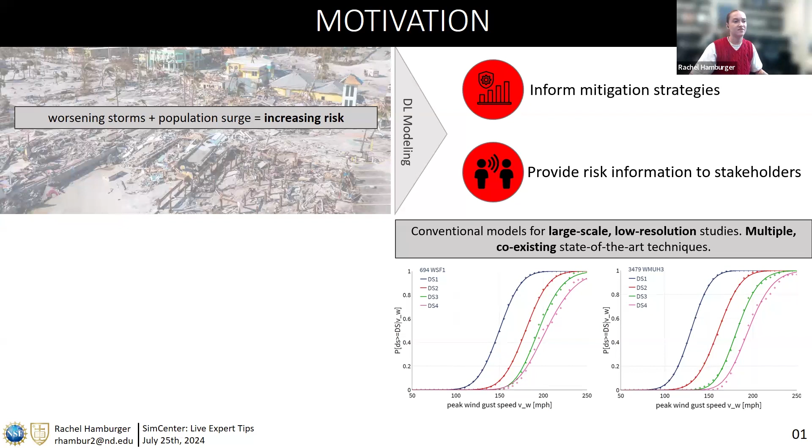However, the conventional models used for this sort of simulation were designed and are used for large-scale, low-resolution studies, while the more complex models and data used to calibrate them are part of largely proprietary systems. Now, there are many examples of research advancing beyond the traditional. However, the organic evolution of this field has led to several coexisting state-of-the-art techniques. Thus, we propose our unified approach, which presents a standardized vocabulary and framework, enabling a better understanding of gaps, needs, and capabilities in this research area, while facilitating integration through our shared parameter library.

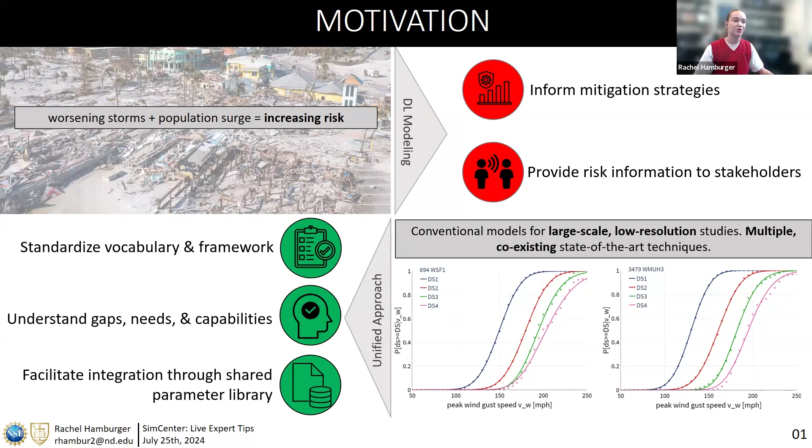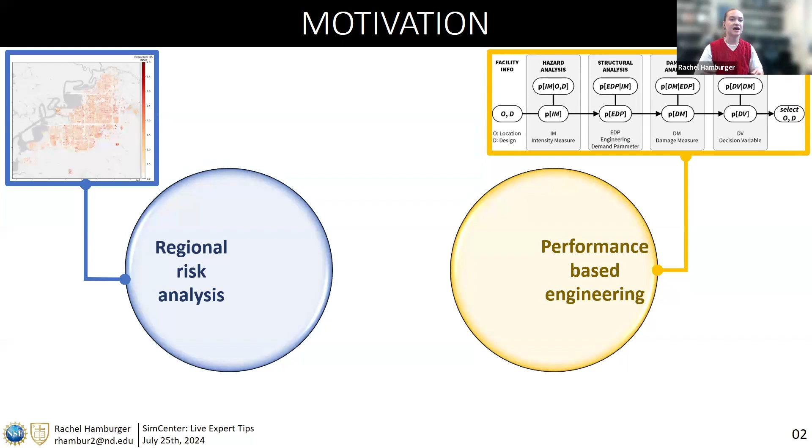So, throughout this study, we were particularly interested in understanding how high-resolution hurricane risk analyses were performed. Historically, regional risk analysis and performance-based engineering were developed independently, with the former relying on more simplified models to assess large building inventories, and the latter focusing on more detailed assessments of individual structures. However, with modern high-performance computing capabilities, these assessment methods are beginning to converge, enabling high-resolution hurricane regional simulations. And so, therefore, it was our objective to bring these granular damage and loss models into the SimCenter's existing infrastructure.

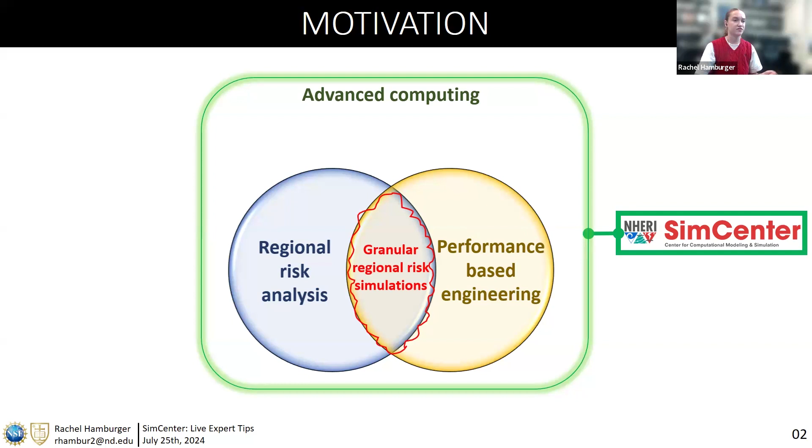Now I'll touch on just a brief outline of my presentation. I'll start with an introduction to our generic framework before moving into its applications to different hurricane hazards. I'll then describe what demand and damage calculations look like for each of our 3 hazards, with only a brief description of loss calculations. And finally, I'll conclude with a discussion about data. Now, for this presentation, I'm going to forego conversations about hazard characterization in the interest of time. But if you're interested in learning more about this step, we are publishing a manuscript which includes detailed descriptions about that.

Throughout this study, consistency in vocabulary remained a top priority for us. We paid careful attention to all of the terms in literature and used this to inform a cohesive dictionary of the vernacular that we use throughout our study. The table on the left is a list of all of the vocabulary that we define in our manuscript. And I'm not going to go into detail about each of these, but I do want to highlight 3 key asset definitions that are very important to understanding the framework.

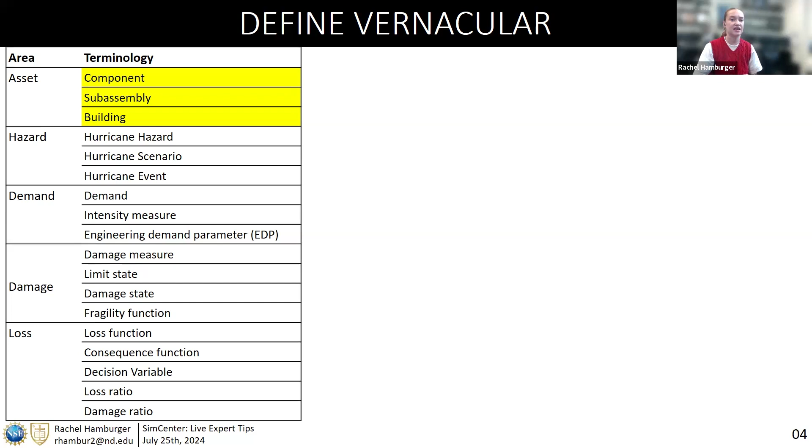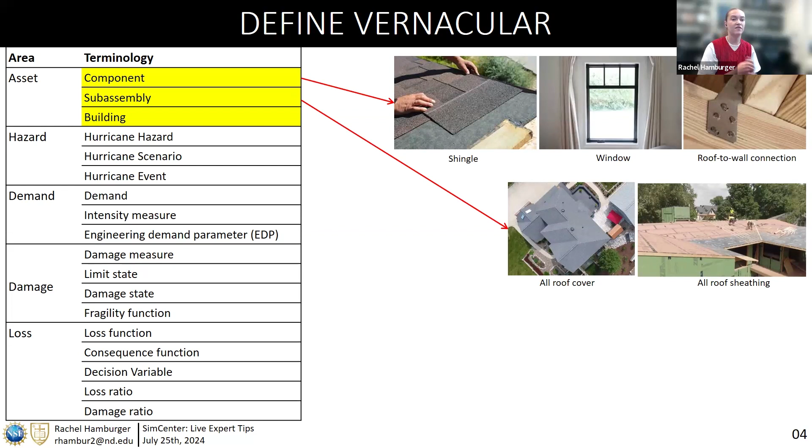The first is a component, which is the smallest functional unit of a structure and includes examples such as a shingle, a window, or a single roof-to-wall connection. The next is a subassembly, which is a class of components that all function together, such as all the roof cover or all of the roof sheathing on a structure. And then finally, we have a building, which is the entire structure comprised of multiple subassemblies. Now, keeping these in mind, I'm going to continue to introduce some definitions as they are relevant throughout the presentation.

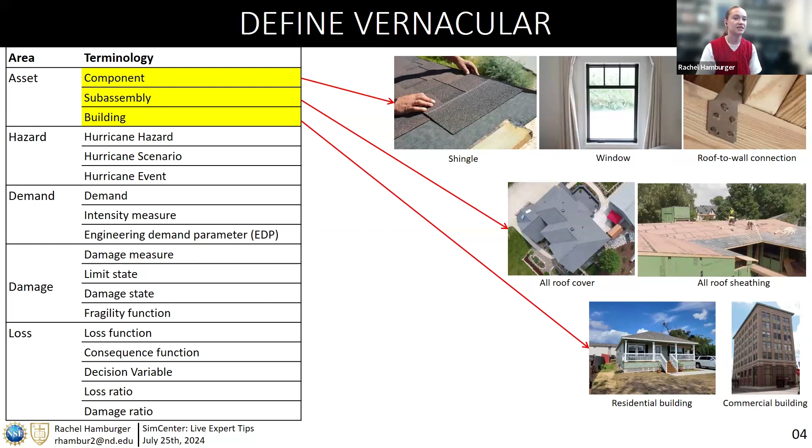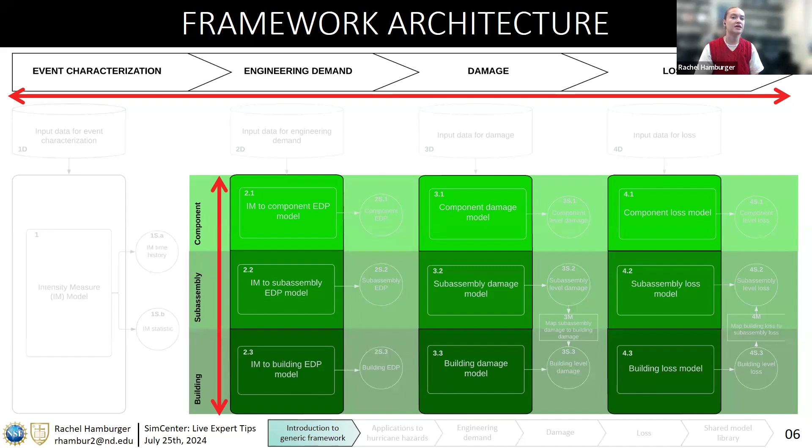Okay, let's move on to the introduction to our generic framework. The architecture of the framework could be understood as a matrix, with columns representing steps that follow a performance-based engineering setup, including event characterization, engineering demand, damage, and loss. Rows are decomposed by resolution, and they describe whether analyses are performed at the component, subassembly, or building level.

Each step is comprised of a unique group of nodes, and nodes are labeled according to their function. At the top, you'll see our input data nodes that have a label of D. And though the specificity of input information will probably change depending on the resolution of the model that you're using, the input data nodes are meant to describe the minimum information needed for each step.

Next, our gray rectangular boxes are our method or model nodes. Available model nodes are informed from those commonly available in literature, and they vary in terms of specificity of input, the resolution of the output, and different parameters or calibrations. These nodes are labeled x.y and represent a model or a method at x step for y resolution.

In yellow and with a label of S, we have our output nodes, and each step can have multiple output nodes for different resolutions. And finally, in orange, we have our mapping nodes with a label of M. Mapping nodes allow for communication between different output resolutions, allowing the user to traverse easily between component, subassembly, or building-based assessments.

Putting that all together, we arrive at our final product. Now, you'll notice from this figure that the framework is not specific to any one hazard, but with a thorough enough understanding of the literature, it can be applied to different hurricane hazards. So that's exactly what we did. We performed an extensive review of 3 hurricane hazards, and then we used what we learned in order to populate that matrix for each of the hazard contexts.

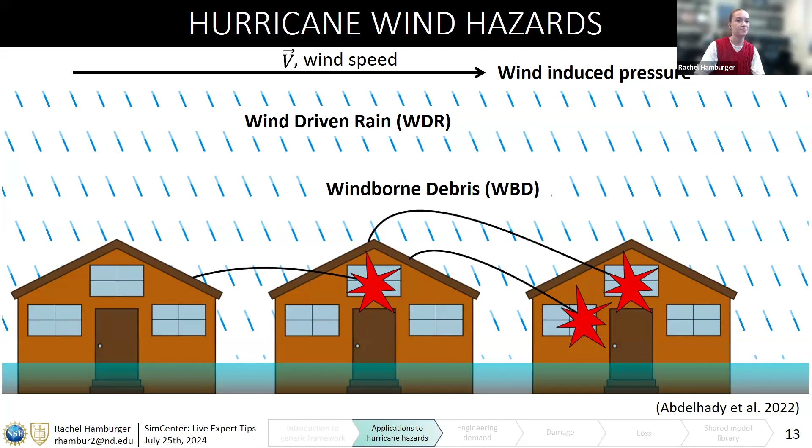Next, we have our windborne debris framework, and you'll probably notice right off the bat that this matrix does not have a loss step. And this is because in loss analysis, the cause of the direct damage is not typically considered. Instead, our loss calculations are dependent on a cumulative total damage incurred. And because of this, it eliminates the need for additional loss models in the windborne debris matrix.

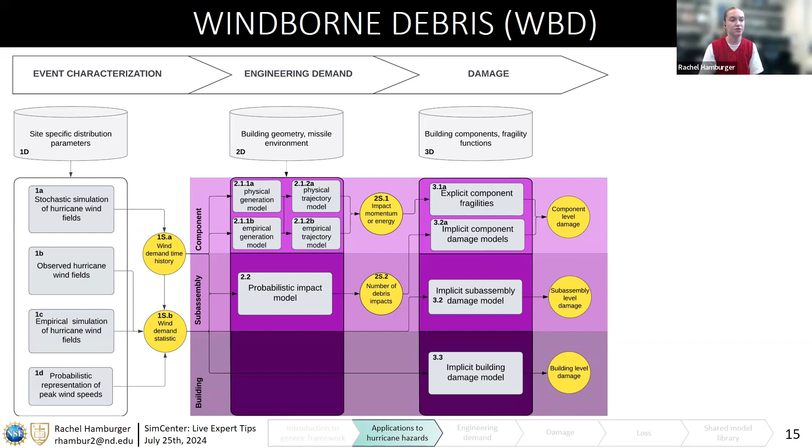And then finally, we have wind-driven rain. And though wind-driven rain does not cause direct structural damages or losses to our building, the resulting contents and interior loss are substantial. So accordingly, most of the work in quantifying wind-driven rain loss effects is focused in the loss section.

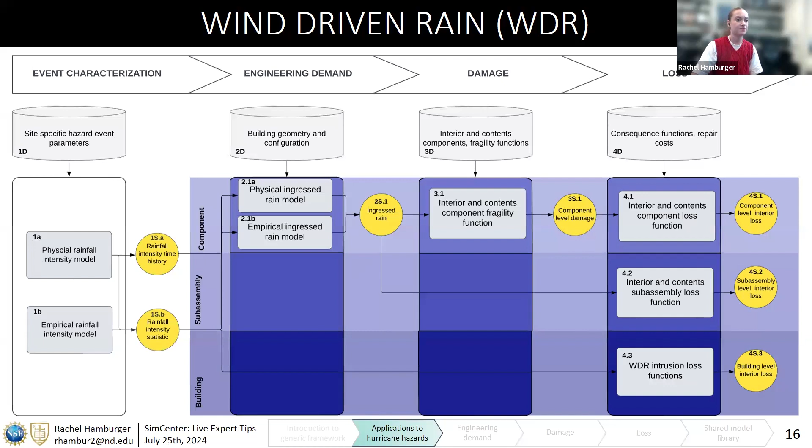Okay, now that we have a solid background on our generic framework and our hazard-specific matrices, it's time to have some fun. We're gonna take a deep dive into several of the steps for all three hazards, starting with engineering demand. Engineering demand is quantified by engineering demand parameters, or EDPs. And EDPs are response quantities that can be used to directly measure the performance of a certain component, subsystem, or system when exposed to hazard loading.

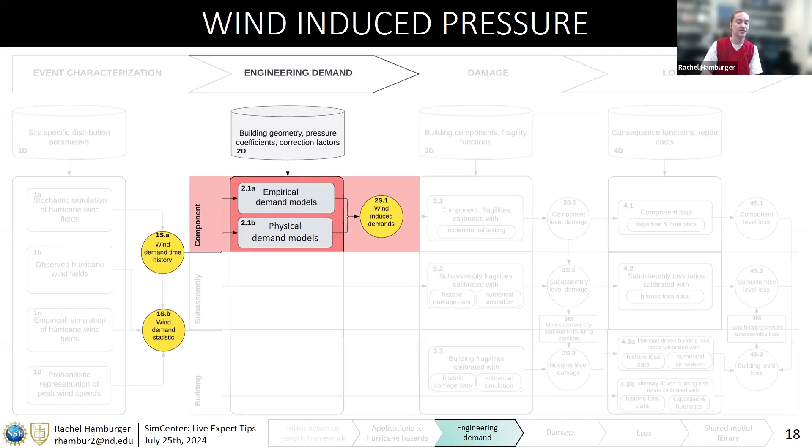I'm sure it comes as no surprise, but the EDP for our wind-induced pressure analyses is the pressure or the resulting uplift forces on the structure. In this step, we take some measure of hurricane wind speeds and feed it into either empirical or physical demand models to calculate this pressure. So let's take a look at some examples of those.

The most common representation of an empirically calibrated pressure equation is our ASCE 7 equations. ASCE 7 presents a procedure for simulating wind pressure on either the main force resisting system or the components and cladding of a structure. And these equations are dependent on our internal and external pressure coefficients. These coefficients can be sourced either directly from the standards or they could be taken from alternative sources such as databases. Now, because these equations are used for design, they often provide a conservative estimate for pressure. So because of this, researchers have proposed using a modified ASCE 7 equation to remove that embedded factor of safety.

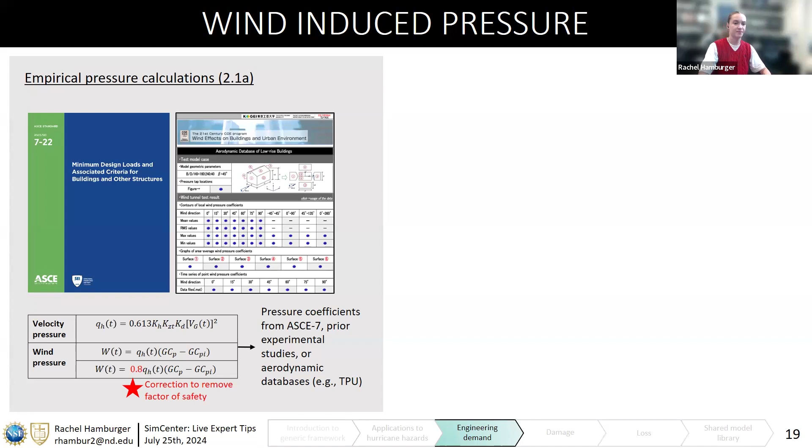Next, our physically derived pressures would come from either experimental wind tunnel tests or more complex numerical simulation like computational fluid dynamics. And I want to note that larger and more complex structures will probably require these more robust wind pressure models, as well as additional EDPs may need to be considered, such as interstory drift or accelerations for buildings that are dynamically sensitive.

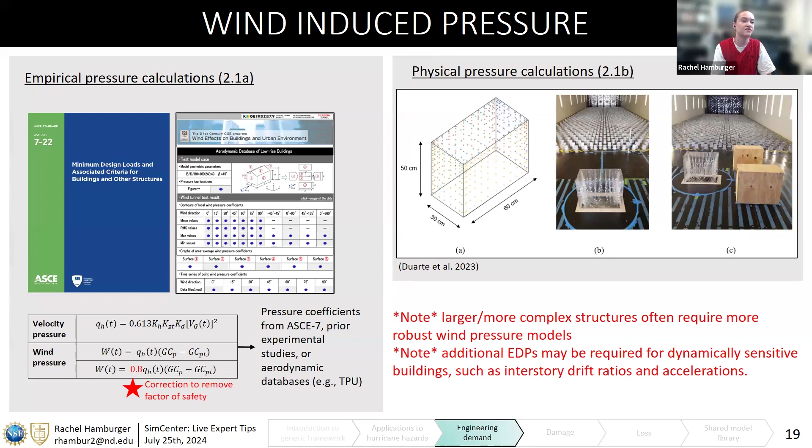Okay, now let's move on to windborne debris. The EDP models for windborne debris exist in both the component and subassembly levels. The component EDPs are separated into two distinct steps, including the generation of a debris object and the flight trajectory of that debris object.

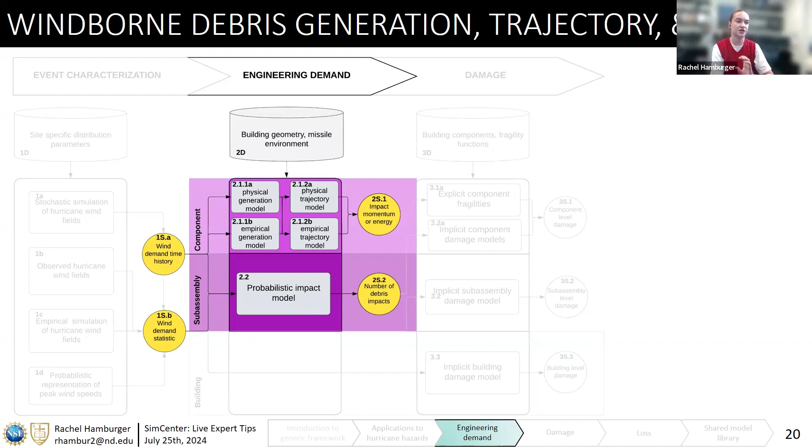Again, we'll start by defining some vocabulary. So on the component level generation models, a source building generates debris that will eventually hit a target building of interest. Debris generation can be modeled explicitly at the component level through a pressure analysis of the source building. And to do this, you would catalog the components that fail and subsequently become airborne. Now, obviously, there are many different debris types, but ones that are commonly considered are roof cover, roof or wall sheathing panels, or rooftop gravel.

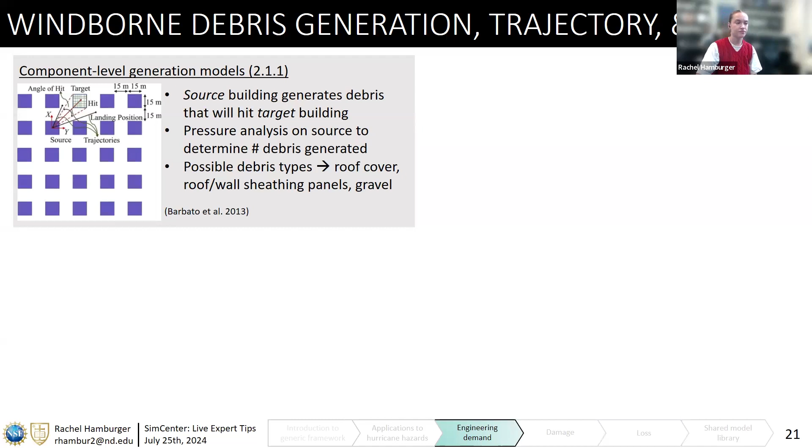Once the debris is generated, we then have to model its flight trajectory. Physical models trace the trajectory of debris objects in three-dimensional space by solving the equation of motion. But a less computationally expensive option is to use empirical formulations. For example, some researchers have proposed sampling the debris landing position from a Gaussian distribution.

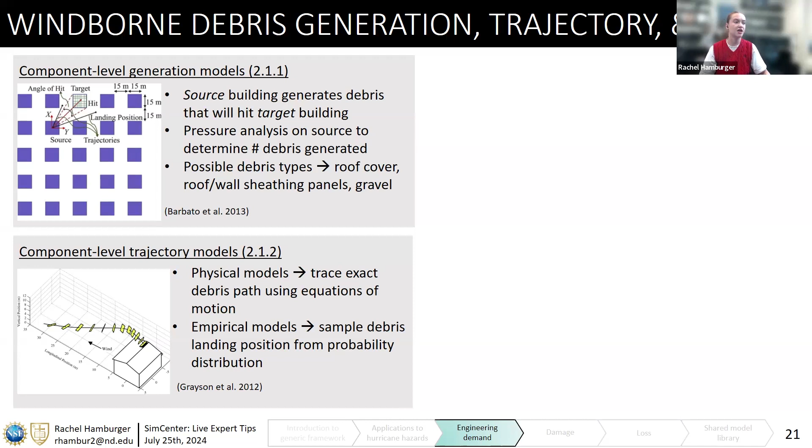And if the trajectory of the debris object intersects with the target building of interest, then the velocity of that missile at impact will be used to find two possible EDPs: either the impact momentum or the impact kinetic energy.

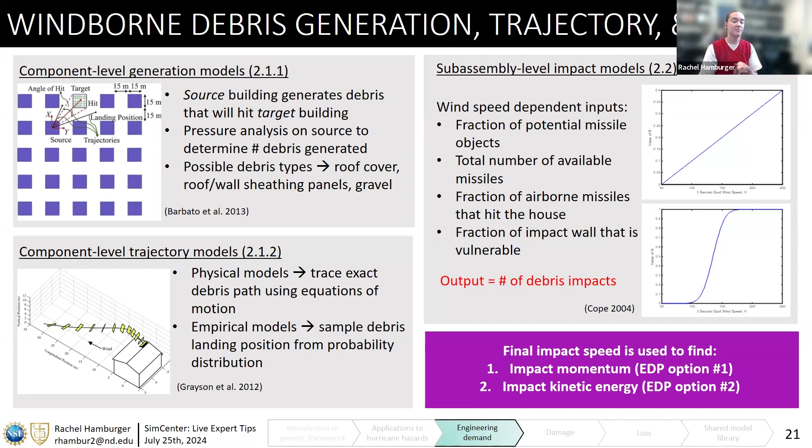Finally, let's take a look at what EDPs look like at the subassembly level. And I want to note that this is a methodology that was originally proposed for the Florida Public Hurricane Loss Model. Here we're finding the total number of debris impacts on a structure as the product of four independent factors that are calculated based off of wind speed. And those factors include the fraction of potential missile objects in the surrounding environment, the total number of available missile objects, the fraction of airborne missiles that hit the house, and the fraction of the impact wall that is going to be vulnerable to those impacts.

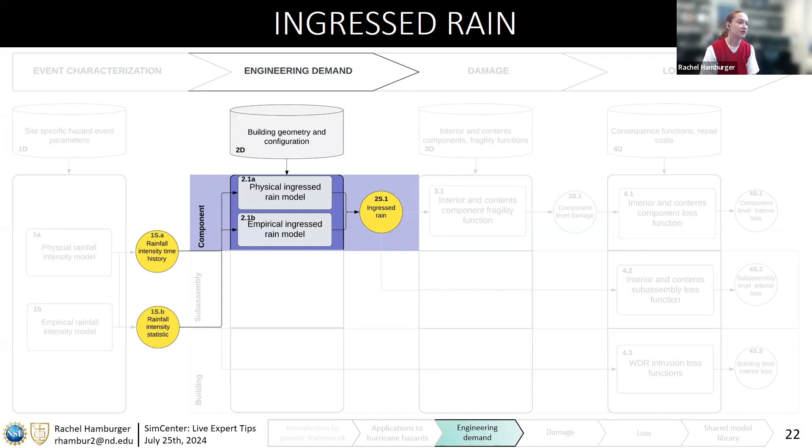Finally, the EDP for wind-driven rain calculations is the height of ingressed rain. And one important thing to note here is our change of inputs. Even though wind flow effects are certainly important to consider for this analysis, wind-driven rain calculations require some measure of rainfall intensity.

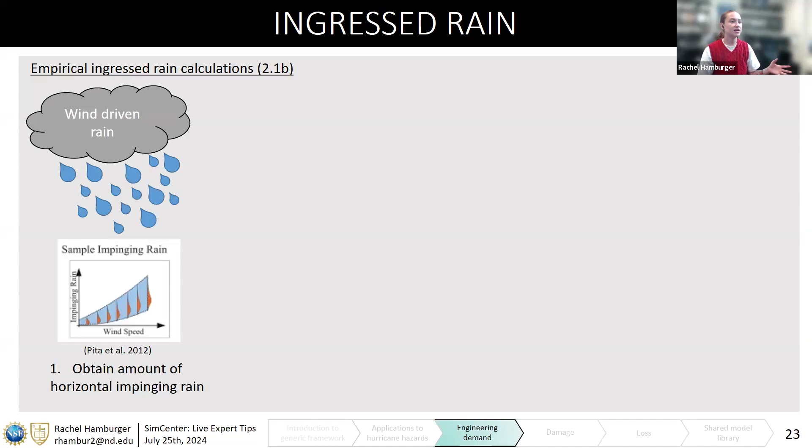I'll briefly step through an empirical process for calculating the height of ingressed rain. It begins by finding some measure of the horizontal impinging rain on a structure. We then need to obtain values that are specific to the individual building and the event itself. The first of those is called our rainfall admittance factor, which captures the effects of the building geometry and also the aerodynamic interaction between the building and the wind flow. And then next we have our surface runoff coefficient, which captures the rain that runs off the building facade.

Finally, once we have those factors, we can use empirical formulations to calculate the total volume of rain that is ingressed into the building. And here we need to consider rain that penetrates through either pre-existing defects in the components of the structure or through breaches of the building envelope.

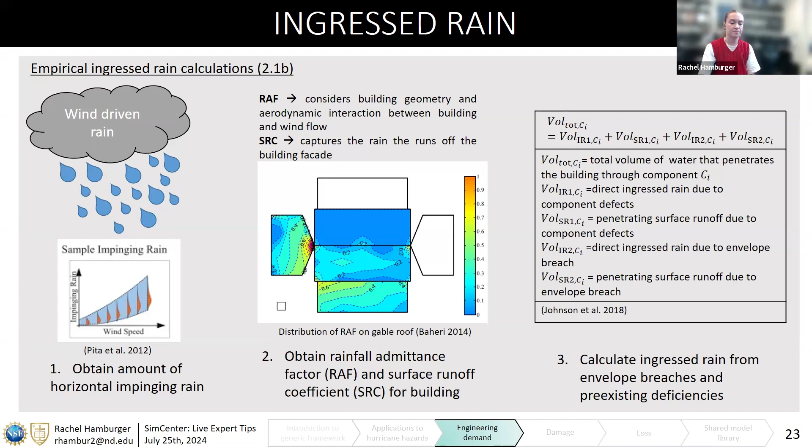Now, I'd like to end this section with a brief discussion about EDPs in general. The EDPs enable higher resolution studies of specific feature performances, and they also result in reduced uncertainties in subsequent damage calculations. However, when you introduce EDPs into your risk analysis, you are adding an extra step. So this will increase your computational expense and also requires more detailed input data.

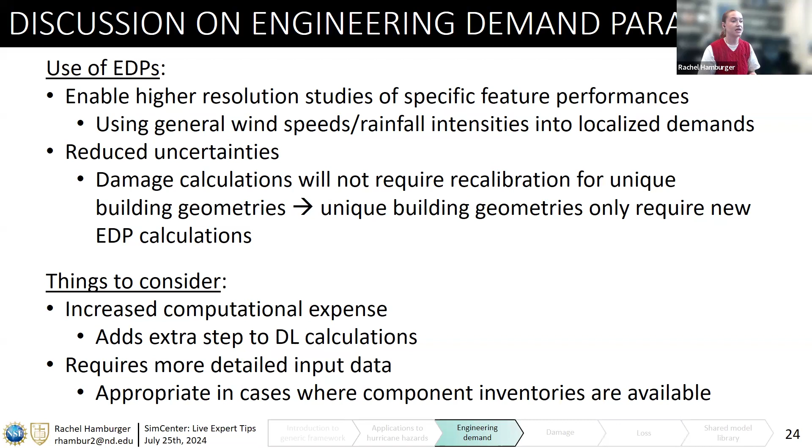And you might notice from this slide that it looks a little bit like a pros and cons list, but I am specifically not using those words because through this study and through this presentation, we never wanted to advocate for a specific methodology because not all methodologies are appropriate for all problems. But rather, it was our goal that by understanding the different pathways and the different models available through our frameworks, a user would be able to assess their needs and decide whether a high resolution analysis that does require EDPs would be appropriate for their specific context.

Okay, the next step we are going to look at is damage. And before we dive into the hazard-specific applications, I want to briefly review fragility functions, though I'm sure most of you have at least heard of these before.

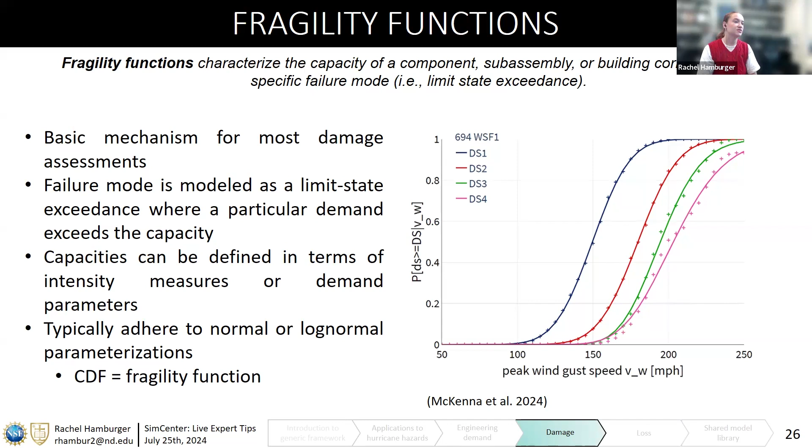Fragility functions are the basic mechanism for most damage assessments. They're the conditional distributions that describe the probability of exceeding a limit state capacity given an intensity measure such as wind speed or a demand parameter like pressure. And they typically adhere to either normal or lognormal parameterizations.

Okay, now let's look at wind pressure induced damages. And again, I am reminding us here of our current position in the framework. And for wind induced pressure, we have models at all three resolutions. And we also introduce a mapping node between subassembly level damages and building damages.

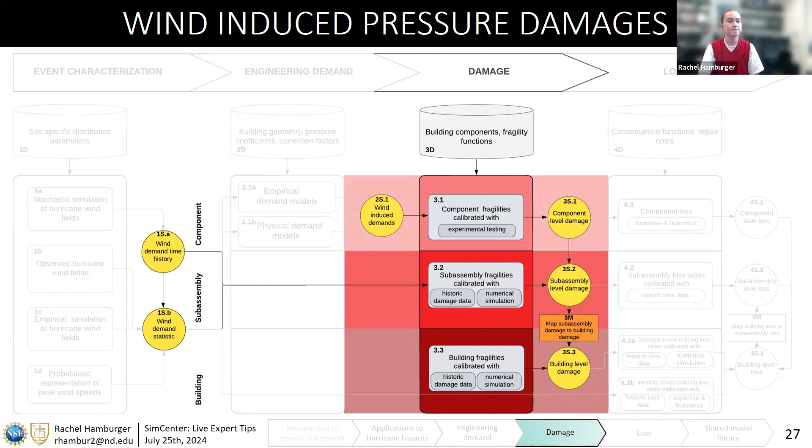Remember our definition of component, which would be a window or a single shingle. Component unit fragilities take wind pressure or some other EDP as input, and these functions are typically confined to describing binary damage states, such as those that inform either the occurrence or non-occurrence of failure. Component fragilities are calibrated through experimental testing, and they can be found in places like manufacturer documentation or published studies.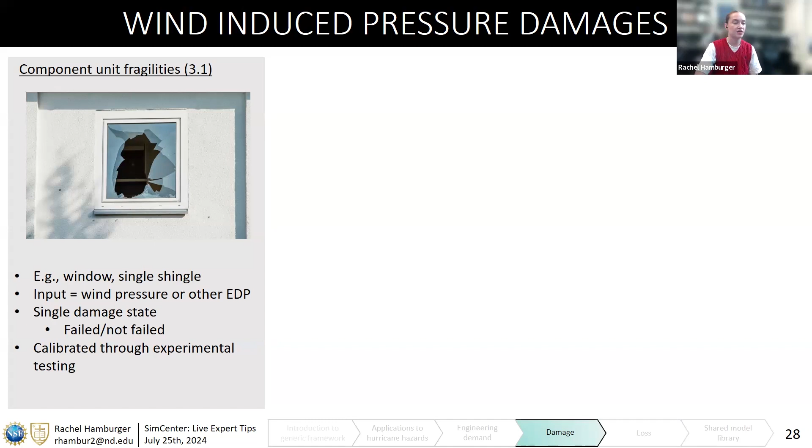Now I'm going to pull these next two up together. But subassembly fragilities are describing the damage of a class of components, remember, such as all of the roof cover on a structure. And building fragilities are describing damage to the entire building. And they're usually available for archetypical structures.

But the input to both of these fragilities would typically be an intensity measure, which is wind speed in this case. And they are usually available for multiple damage states that usually describe an increasingly severe range of damage. And these fragilities are typically calculated with either historic damage data or numerical simulation.

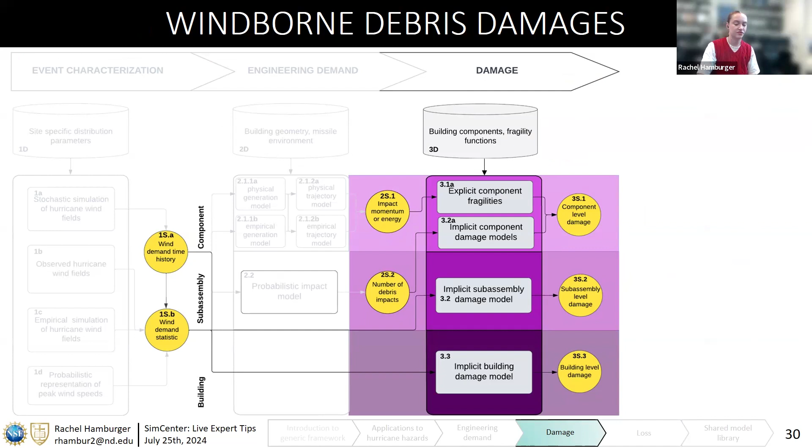Okay, next we move on to windborne debris damages, which also has models at all three resolutions. Our component damage models can either be explicit or implicit. The explicit will take either impact momentum or impact kinetic energy as an input and return, again, the single damage state that informs the occurrence or non-occurrence of failure.

Our implicit model will describe the probability of at least one component failure from impact, and this is modeled as an exponential function, with our input being the total number of debris impacting the building. So that subassembly level EDP that I talked about a few slides ago.

And again, I'll bring these up together, but at both the subassembly and building levels, windborne debris damage can be modeled implicitly. So if the fragility functions were calibrated with data from either high resolution simulations or post-disaster damage surveys that capture the damage from our windborne debris, then this would constitute an implicit model of windborne debris damages. And so here the fragilities take wind speeds as input and also describe a set of increasingly severe damage.

Finally, I'll talk about the wind-driven rain damages which occur only at the component level here. And this methodology requires a detailed knowledge about the layout and also the specific contents that are in a structure. This figure and table are taken from a study by Park et al. And in their methodology, they knew the exact layout of the structure and modeled the individual contents of the house.

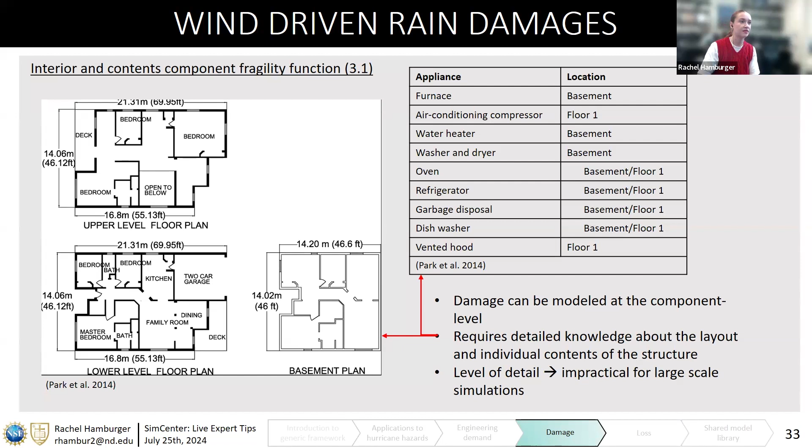So far, we've looked at damages for each individual hazard, but what happens if we want to consider hazards together? How can we model this cumulative damage? So this figure shows how we can do a combined damage analysis at the component level, which involves an iterative analysis where demand and damage are coupled.

If the building envelope is breached by either wind pressure or debris impact, then the building will experience internal pressurization, and therefore the pressure should be recalculated and the asset needs to be rechecked for damage. And this will continue until the building reaches a steady damage state. And then you can find the cumulative damage as a result of both debris and wind pressure.

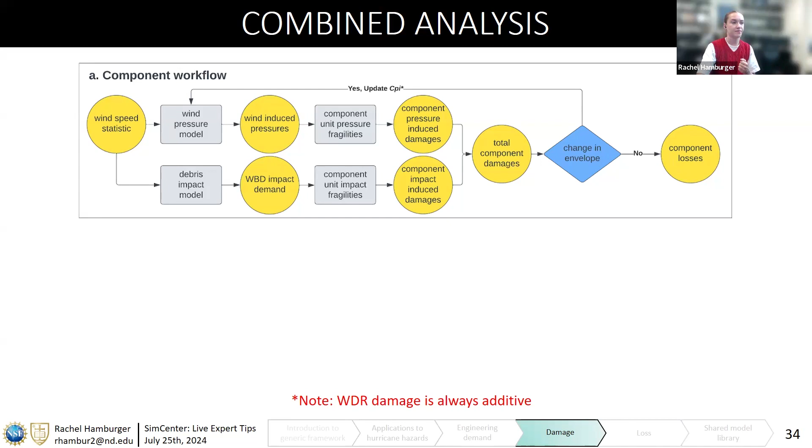At the subassembly and building level, what this looks like is that you need to know if the windborne debris is implicitly modeled in your damage models. And if not, it needs to be captured in some other explicit way. And just a final note is that wind-driven rain damage is always additive, so it's not shown here coupled with the other damages.

And because of time, I'm not going to go into detail about our loss calculations, but I do want to show you just the overview images to prove that we did similar groupings of loss models. Remember that for losses, we can combine the damages from our wind-induced pressure and our windborne debris. So here we have 4 options for loss modeling.

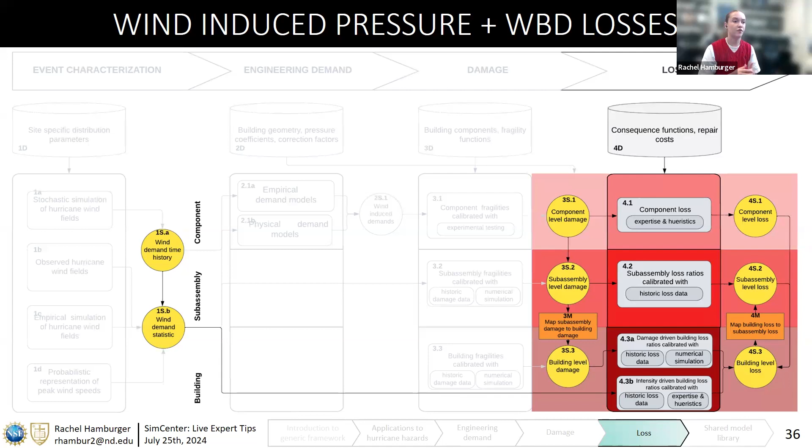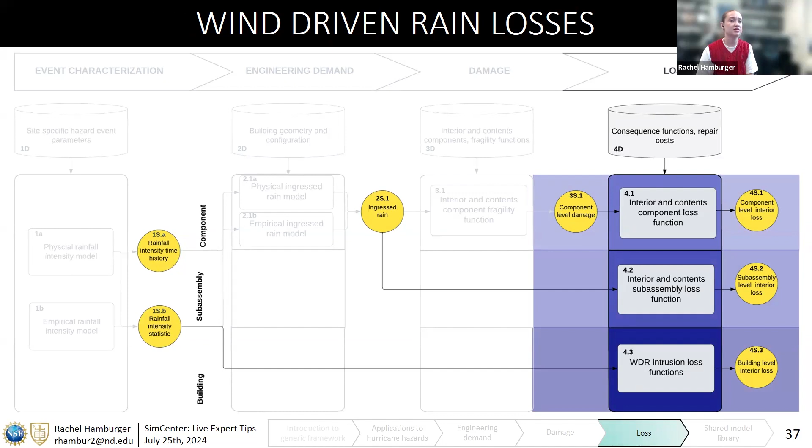And we also have, interestingly, introduced a kind of a reverse mapping, where if you are performing a building level damage and loss analysis, you can take those building level losses and map them back onto subassembly level losses, which would be useful if you would want to inform things like specific repair actions in your model. And then for wind-driven rain, as I discussed, most of the existing methodologies actually do concentrate in the loss modeling. And so here we have options for all 3 resolutions.

Okay, and I will end the presentation with a very brief discussion about data and our shared model library. As I mentioned in the beginning of the presentation, we reviewed a significant body of research for this study. And so far, I've only discussed how we can organize these works into a cohesive schema. But we were also interested in how we could make these types of simulations more accessible to the general research community. And to at least start doing this, we are publishing 2 supplementary materials along with our manuscript.

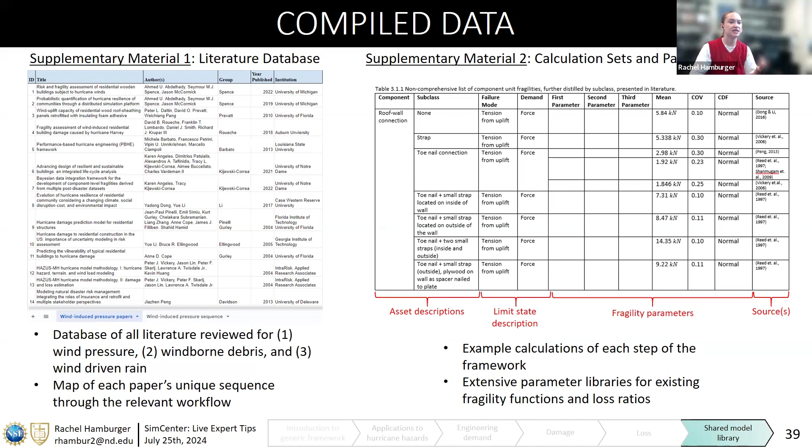The first is a database of all of the papers that we reviewed for each of the 3 hazards. And this database will include a unique sequence assigned to each paper that represents the pathway of nodes it takes through the respective framework. And then we also compiled a very comprehensive set of calculations and models and parameters. And so this figure on the right is just a screenshot from that document of component unit fragilities. And as you can see, there is extensive information about the asset, the limit state fragility parameters, and of course, citing the original source.

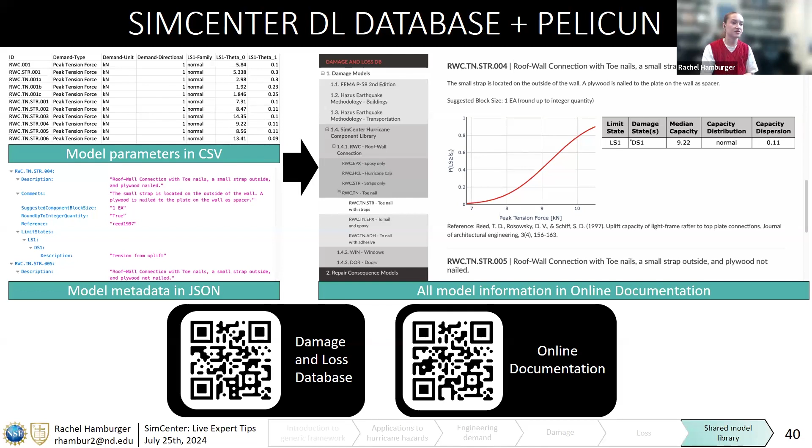And I'll just close with a few words about data sharing. So our compiled libraries and databases are really intended as living repositories for our research community. In a lot of ways, the seismic community has already successfully done this with fragility parameters and consequence functions for seismic analysis organized and disseminated through FEMA P58. So my final message would be to please use this data, leverage the models that are already existing. And if you have your own data, add it to the database and share it with others.

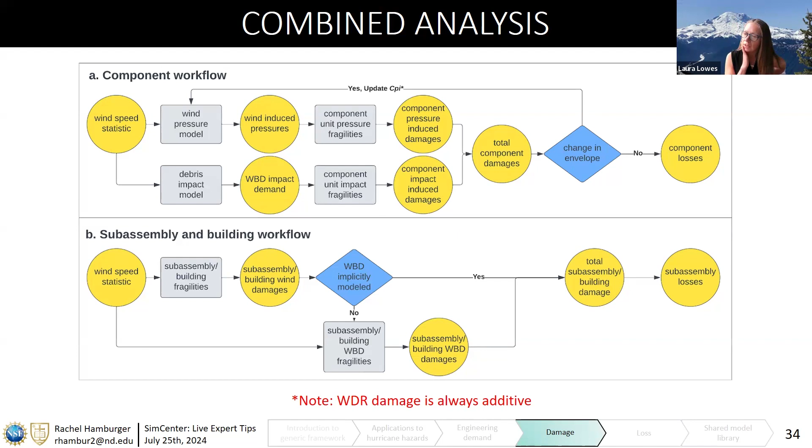Second question, where within the framework do you think is the greatest need for additional research? That is a great question. Thank you for asking it. I think from what I noticed in my research, there is the least consensus in the loss step. And I think there's a lot of reasons behind that. Maybe paramount is that there's just so many things that should be considered in a loss analysis.

Obviously, the most easy to conceptualize is our direct structural losses, right? Because it presents that 1-to-1 ratio between damage and loss. Whatever components are damaged, you know that this is their replacement cost. But there are things that are a little bit harder to quantify, such as the losses to the interior and to the contents, and they vary so much from household to household.

And then as well, there are things that don't have direct physical costs, but have indirect economic costs, such as all the social costs of hazard damage, like displacement or downtime if we're talking about commercial buildings, injury, death, all of those things that are really not typically considered in simulation. So there's a lot to unpack, and among the literature, there's the least consensus about how we should do those loss simulations. So maybe work there in quantifying all of these different loss values is important.

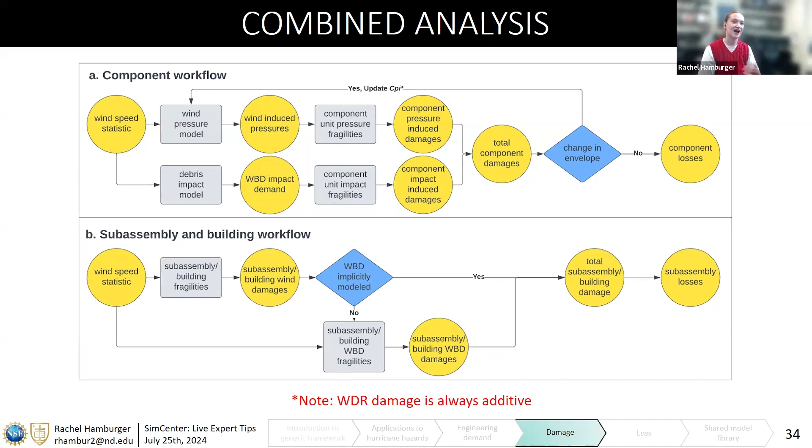And without going on a tangent, I will add also that the loss models are often hardest to make because the data is sparse. A lot of the loss models are calibrated with insurance claims data, and that data is often proprietary or needs to be purchased, or includes sensitive information and can't be distributed publicly. And also, if you rely solely on insurance data, then you are not accounting for those social costs, as I mentioned before. So I think there's a lot of interesting questions to consider for loss right now.